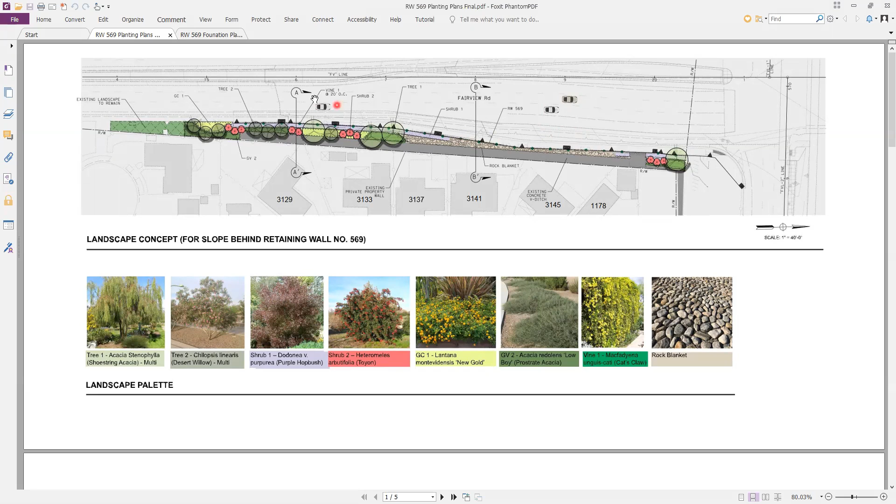So as far as what's going on out there, the improvements, as you know, the Fairview overcrossing is being rebuilt. Fairview is being widened, consistent with that bridge widening. There's a right turn pocket being added onto Fairview for access to the southbound 405 on-ramp.

And so there's a retaining wall that's being built to accommodate all those road improvements. Under that gray area there, that's actually an existing drainage ditch that conveys drainage for that area and needs to be maintained.

Under that drainage ditch, I don't know if too many people know about this, there's an AT&T duct bank utility in this area. And then visually you can see right along your property line, there's some overhead utilities located in this area as well.

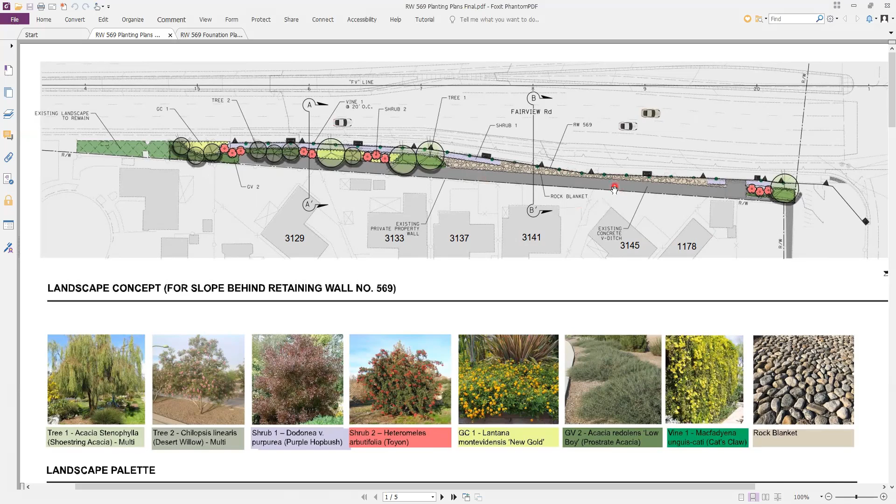So as far as what this exhibit shows, I want to go over it. This is the landscape concept plan. There's a detailed plan set already developed from this, but going from left to right, you see there's some existing landscape that remains, and then moving to the right, the proposed landscaping. In that area, there's a pretty good amount of room for us to restore the landscaping.

Going back a little bit, yes, there were existing trees in this area that were removed. So in this area here, we have a good amount of room to work with. There are some trees being proposed along with some shrubs. And then those little green dots on the exhibit, right along the wall symbol, those are actually vines.

They're on 20-foot centers, proposed to be planted on that wall. So as you move to the right, stop right there, Chris, that symbol is a rock blanket. As you go to the right it starts narrowing and narrowing, and you can see this wall alignment is following - you can probably recognize it - the right turn pocket alignment.

And I understand there's some concerns - why isn't there more landscaping in this area? Basically, we're running out of room here, and that rock blanket is on a slope. We'll get to that a little later and explain it in the cross sections. It kind of goes to a pinch point, then widens out just a bit, and to the right there's some more room, which allowed an opportunity to incorporate a little more landscaping - there's a tree and some shrubs there as well.

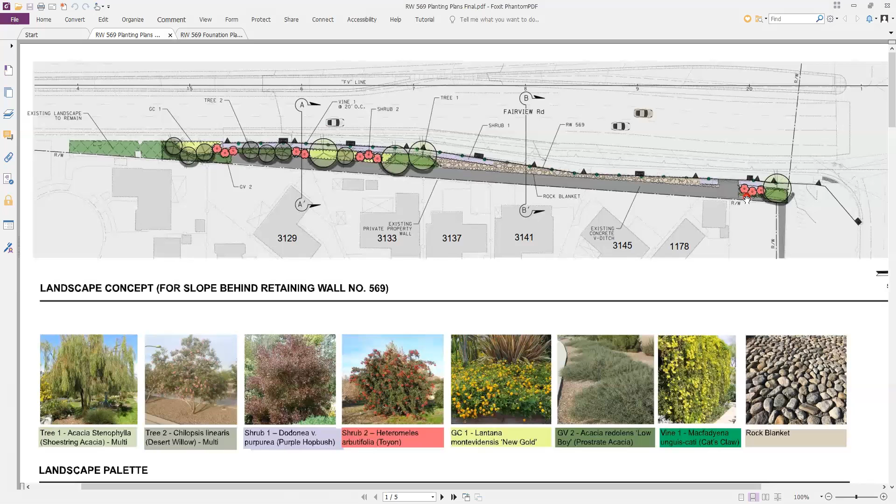So Chris, can you go to the next slide here? Let's go to the cross sections.

If you recall, this is the cross section in that area where I explained there was plenty of room to accommodate landscaping. Looking more in detail, starting with RW 569, that's retaining wall 569, and you can see that part is the retaining wall, then there's a sound wall on top of it. Then you see the proposed landscaping - there's vines, shrubs, and trees. Then there's that existing concrete drainage, and under that we'll show you another exhibit where there's a utility duct bank from AT&T, then the right-of-way, and then your property wall.

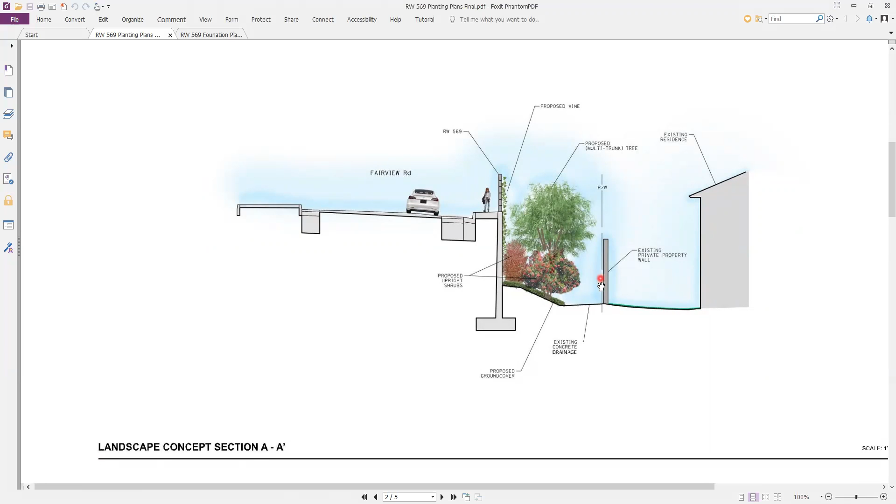Okay Chris, can you go to the next section? So BB is the narrower section of this corridor. You can see again the retaining wall and then the sound wall. In this area, there are vines being proposed at 20-foot on center. This cross section shows you what kind of grades we're working with here.

This rock blanket is being proposed to control erosion in this area and to guide the drainage into the drainage ditch. That concrete drainage ditch area is also an access road. So later on, the city of Costa Mesa will need a wide enough area - and this isn't shown on the exhibit, there's some power lines on the right of way - but they need room to drive through there to maintain that wall and the vines and what have you.

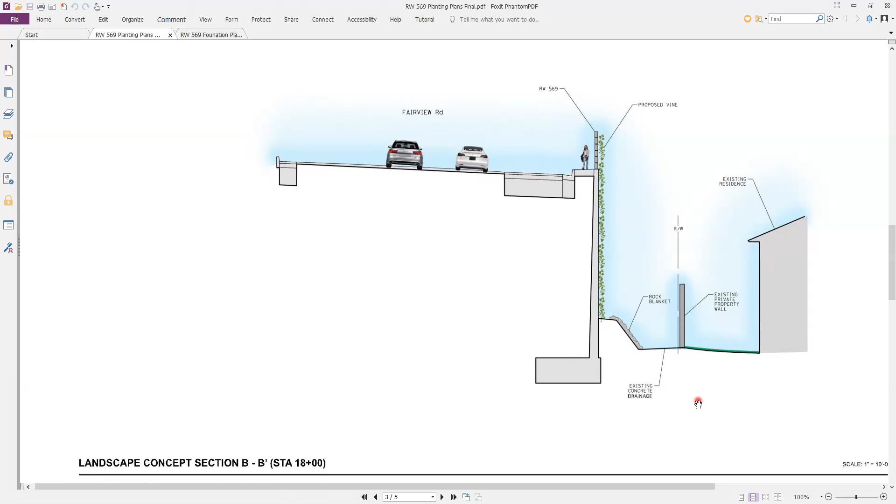Quick question, sorry to interrupt, but that access road is one of our big constraints here, along with the fact the rock blanket needs to be on a slope as opposed to another smaller retaining wall with a flat section on top that could allow more planting surface area. But how wide is that access road now, and how wide did it used to be? Because there was always an access road there, but it was pretty narrow.

It looks bigger now than what it used to be. So typically when something is rebuilt, I don't know the exact dimensions of the existing access road, but typically we try to work with cities to make things right. Whatever that width is, a 10-foot access road is very typical for many uses. We work with the county, Orange County Flood Control District, and that's typical of what they ask for, as well as Caltrans for access roads behind their sound walls and what have you.

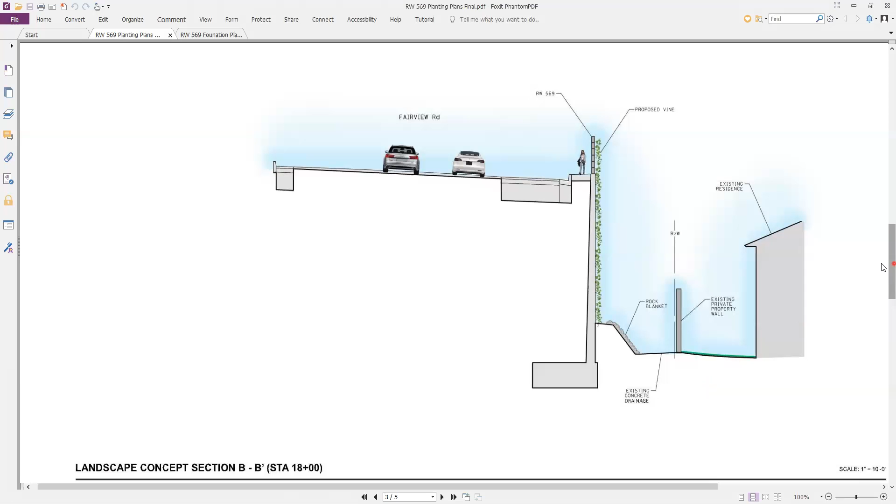And if I can chime in also, our neighbor Debbie, two houses to the left of 3145, prior to the construction there was 9 feet in this access road. Now there's 18 feet, so there's actually way more room now than there was before.

My question is, there are trees that are thinner, palmetto trees, Italian cypress. Is there absolutely no way to put any kind of tree between the rock blanket and the proposed vines?

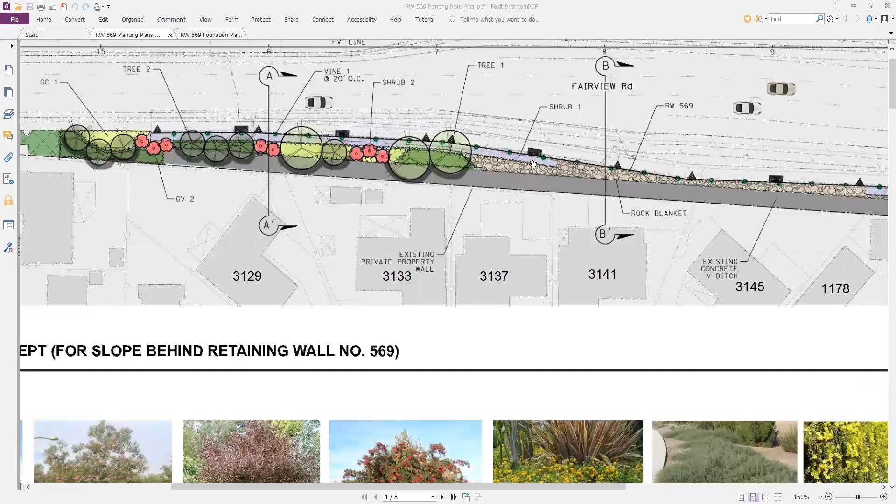We did explore this. We brought this question back to OCTA's landscape architect consultant, who checks what the design builder proposes. One thing we can potentially do in this area where there's limited space is decrease the distance between the vines. Right now, if you notice on the exhibit, it shows 20 feet on center. We can decrease that and make it more dense, essentially making the wall greener, and it will probably grow faster. I'm not a landscape architect, but that's my understanding of what our landscape architect mentioned.

We did not ask if there are other options like Italian cypress that could be planted in this area, but we can bring that question back to him.

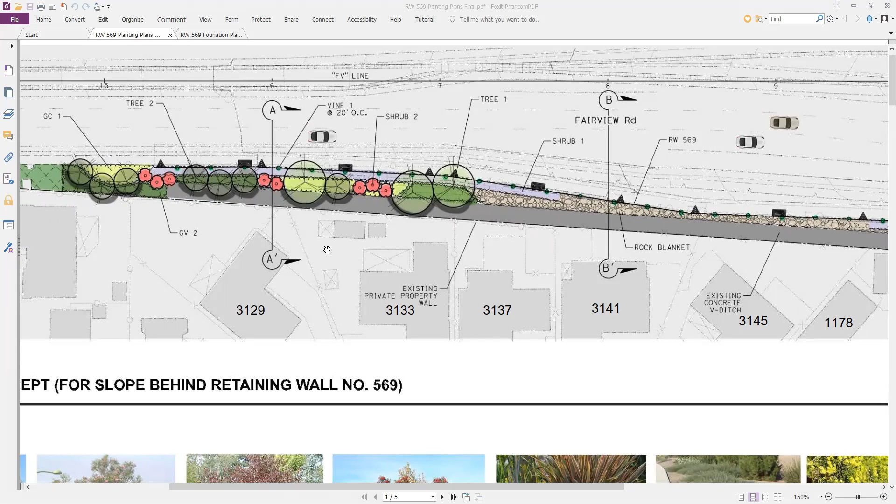Ms. Ramadan, I also want to point out that what Ms. Holtz is seeing is not the final product at all. There's still more wall to be built. As you've seen back there, they have the soil nail, sort of the inside wall. Dennis, you can explain that better than I can. And then they will have the retaining wall itself, built using forms and the rebar that you see going up currently, with concrete pours coming in as well. So the distance that she stated is not necessarily correct.

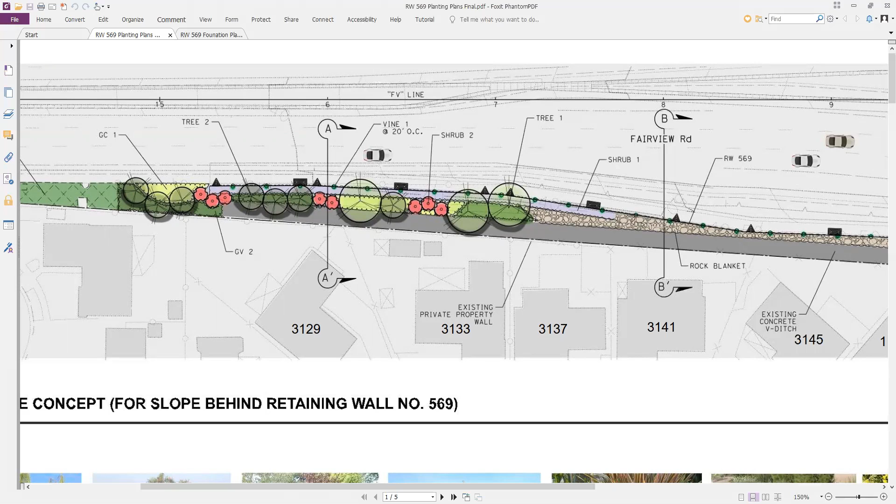To give you background, there are some soil nails being used to stabilize that slope. In progress right now, as you know, the pile driving has been completed for that wall. They're doing a lot of rebar work for the footing and the wall. You see maybe a panel or two. I have a picture from about a week ago — panels are starting to go up.

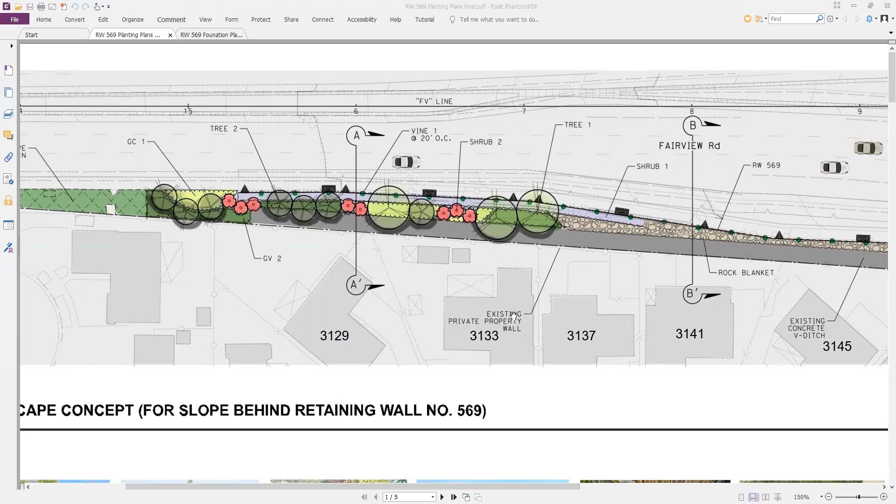They're going to start making their way south along Fairview to continue that wall alignment, and that's going to go on all the way until the end of April, where you're going to start seeing that wall being formed in the alignment. This is pretty close to the final engineering plans.

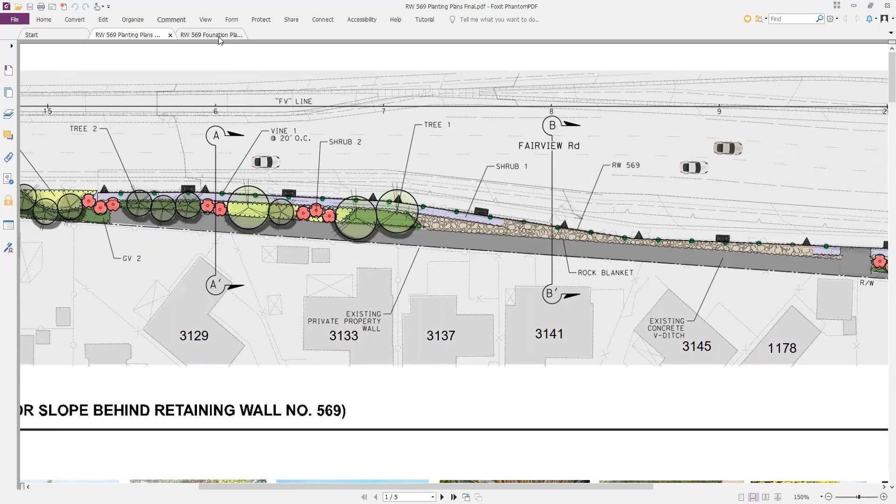We do have a copy of the foundation plan and wall plan that shows the alignment. Let's flip to that quickly, Chris. If you remember the other exhibit, that's the dark line with the squares on it — that's the wall alignment. If you remember the other one, it closely matches that landscape exhibit. That's kind of where Chris is hovering there, where there's more room, but it starts narrowing down there.

To your question, I think we can go back to our landscape architect, where Chris is touching there. There's a little bit of a triangle there, and we could look at whether there's any chance to put some Italian cypress in that area.

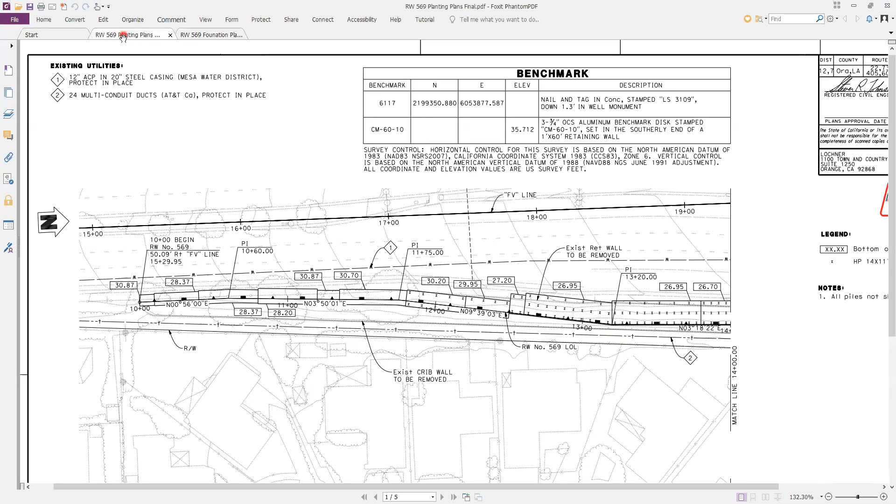Yeah, well, and this is Scott — I would challenge them also on it. It seems like at least 50% of the available space that's there, even in that narrow pinch area, is being taken up by this rock blanket concept, which I get helps with drainage and all that, but that's not the only way to do it, and it takes up 50% of the usable space there. So I see how that little flat spot on top of the rock blanket before you hit the wall is a very narrow spot. Now, whether or not you can fit a tree there is up for debate. I see trees on sidewalk strips all the time with barely 24 inches of space, yet they work.

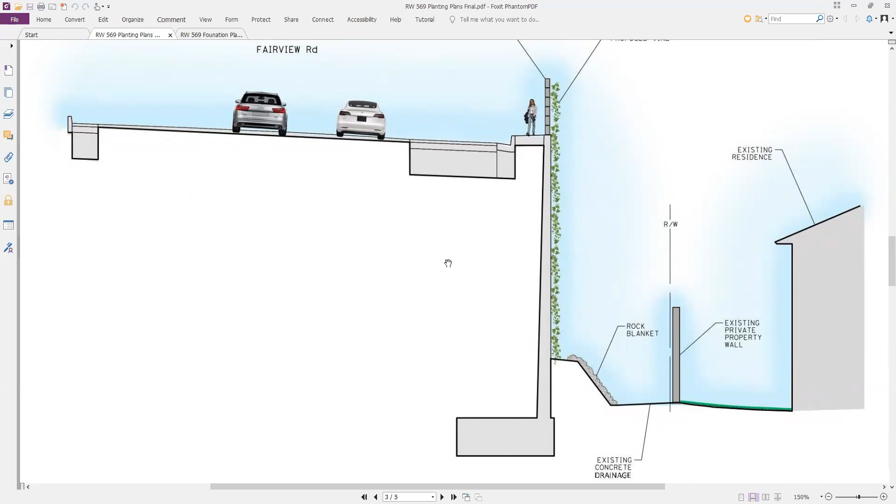If you were to replace that rock blanket with a straight vertical retainer wall and include a pipe drainage to allow water to come out of this newer, increased flat area and down into the bottom area, that would still work perfectly functional. And all of a sudden you would double your space to put a tree.

It's this concept of losing the trees. There were a lot of trees there before. They all got cut down or bulldozed. And now there are no trees, just a gray monolith that we get to stare at.

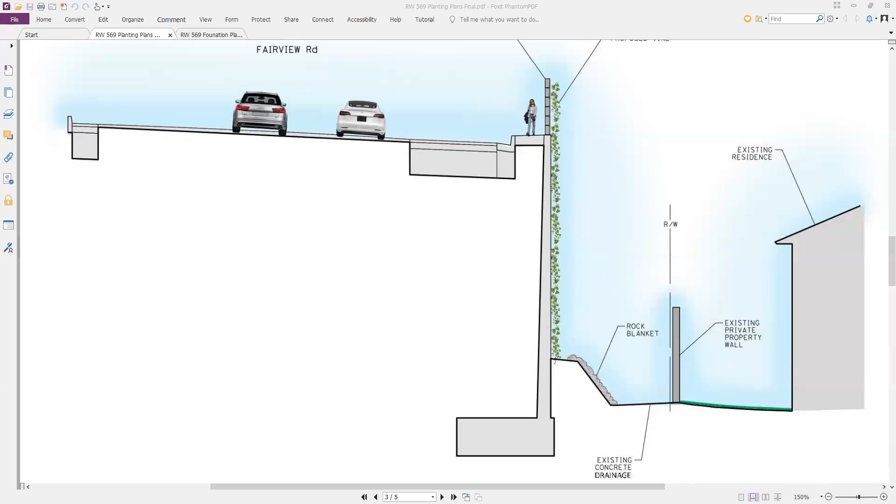And the plants that you're proposing to replace it with are relatively small, low lying. I get they're drought resistant, there's a lot of benefits to them, but aesthetically they're kind of ugly. I'm just going to come right out and say it.

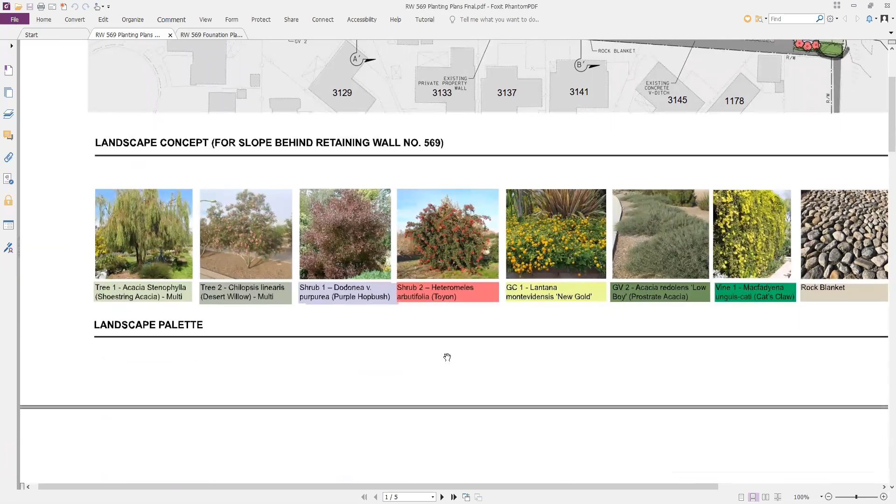I don't have to look at it all the time because my house is across the street, but I miss the trees that used to serve as a visual divider between the neighborhood and the busy road up there. And they helped serve a number of other functions besides just acting as a visual barrier.

Those are gone, and if you're Debbie or Erica or anybody else, you've got nothing back there. It's going to take a decade or more for those vines to grow. They're vines, even morning glory, they're still slow moving.

There's gotta be a better way. So if I understand your question, the idea is that in that area next to the drainage and the maintenance road area, instead of a rock blanket, to incorporate a wall, some kind of retaining wall. A small landscaping wall.

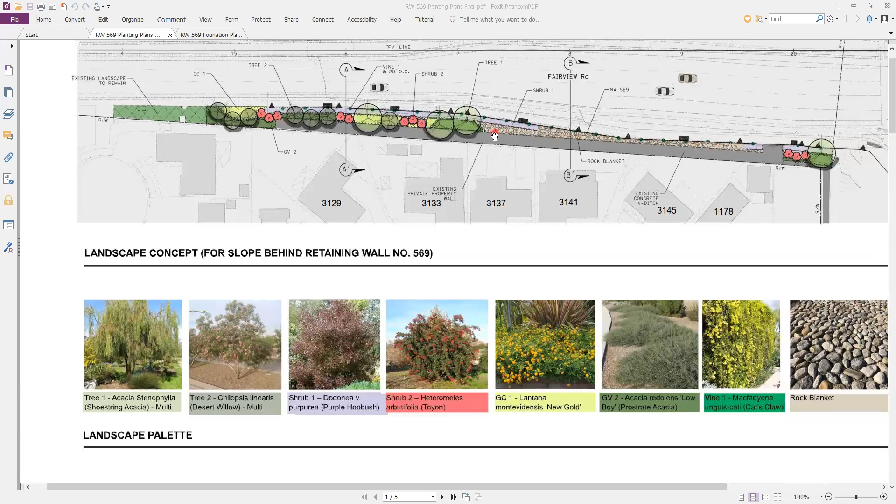If I'm eyeballing it, your cross-section view that you had earlier, I think is probably a better way to think about it. Yeah, that one right there.

Where you've got the rock blanket and where it's a slope, imagine that slope gone, and instead you have maybe a 3-foot wall, a small wall that you could make out of just about anything. And then that would allow for essentially double the flat area on top of it.

Okay, well, we can take that back and take a look at it. I'm just kind of thinking out loud here. We're going to need to look at it if it's a wall that's being proposed.

First it's City of Costa Mesa. We'll need to run this by them. They'll have to buy into it because it's going to be their wall to be maintained.

And then all the other entities in there - you have AT&T, and I believe Edison's back there too with their poles. To be honest, their poles are not exactly straight up, there's some encroachments into the 10 foot. So we're going to need to have those entities also agree on what's going on here as far as providing access.

Understood. Who are you talking to at the city, so that we may be able to grab their ear and let them know what the citizens are interested in doing? Our primary contact is Jennifer Rosales. Okay.

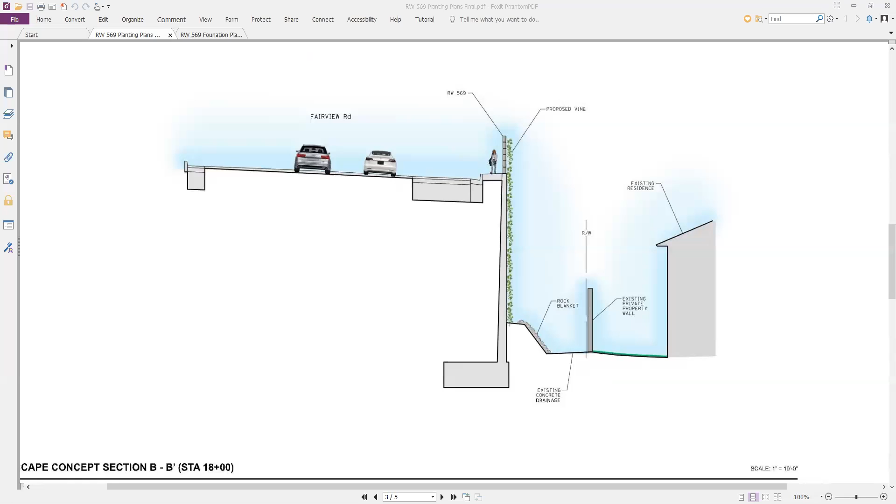Thank you. And then also, what is the dimension between the rock blanket and the proposed vine? Do you guys know how many feet that is? I don't think we have that right here. Chris, maybe, do we have the landscape plan? We're talking about right here? Yeah, actually we do, down below.

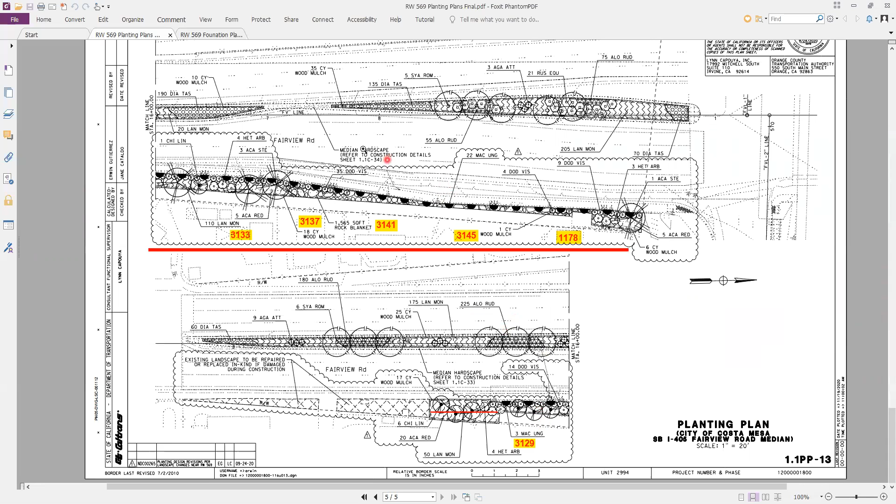I don't know if that gives you the view you're looking for, Dennis, in terms of - I don't have the full landscape plans. So if you zoom out a little bit and look at the scale.

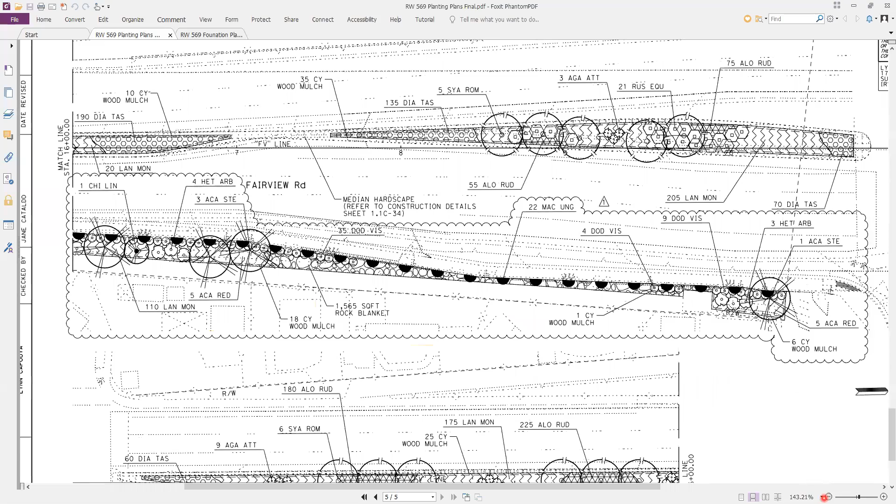Yeah, we're going to have to go back. This doesn't have the wall on there, it looks like. This is just the landscape area, but it's 1 inch equals 20 feet. The wall symbol is not on there, so I can't pick it off. We can get back to you. We'll need to go look at 2 plans and pick it off from there.

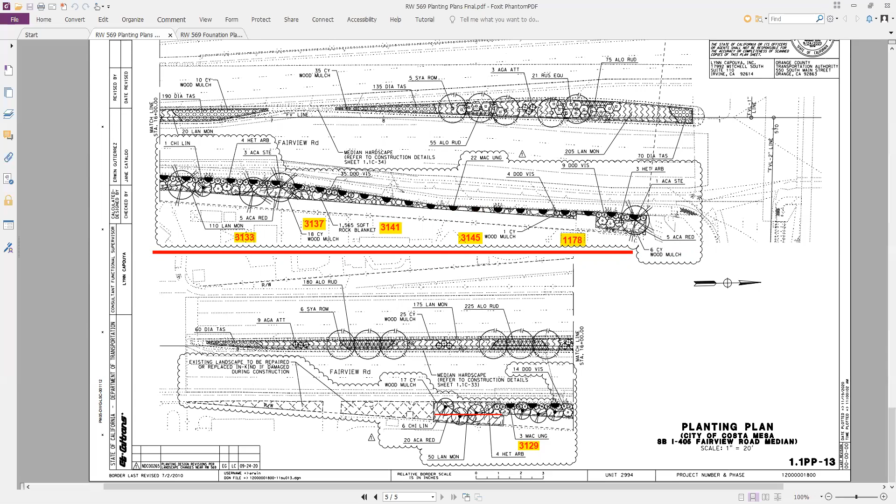Okay, and I'm just more concerned - is there no tree out there that will fit in that amount of space? That's my first question. The second question is, you guys said you've been dealing and working with the City of Costa Mesa. We were told in writing that for every tree removed, 2 were going to be put back in its place.

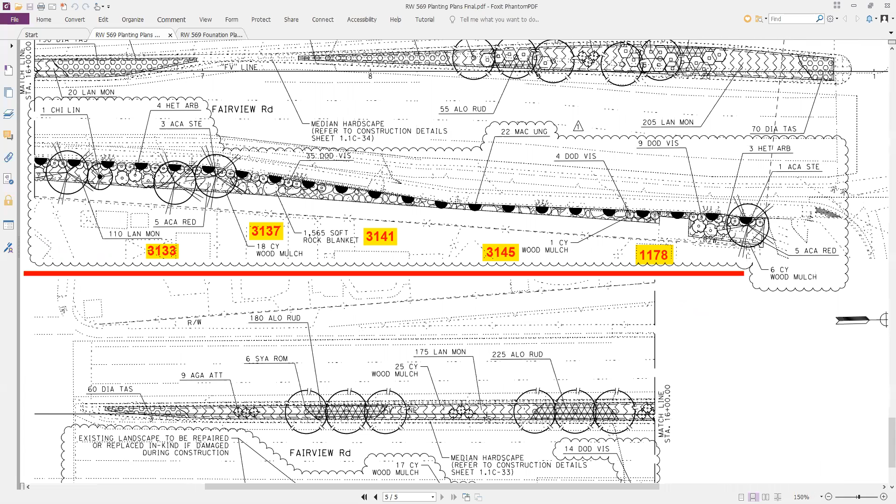Like, how is it possible to have a whole wall of trees and now nothing other than proposed vines? How did that happen? Why were we not involved? Why were there not meetings? This is significantly impacting not only our property values, there's a range of things that this is impacting, and we weren't consulted at all. And now we're going to have to live with this for decades to come.

Okay, well, we'll go back and take a look at the proposal to incorporate more trees in those narrower areas. I think the idea of going with the Italian cypress is a good idea. But I'm not a landscape architect, so we'll consult with him and get back to you guys.

Ms. Ramadan, I think to answer your question, this is the conversation to be having. And granted, you're the one pushing for that, and I appreciate the frustration you've had about the discussion. The landscaping is still quite a ways off, and that includes the rock blanket. It's significantly down the line. There's work to do on the wall itself, which is expected to wrap up hopefully by April. We talked about that before, April to May, actually mid-May.

And then there's cleanup work to do, right? They got to bring the area back, remove all the materials, remove all the equipment, et cetera. So about June, I think, is when we expect that to happen. But landscaping will take some time after that.

And the way the process works is that there is a landscape plan, a development plan for it, with guidelines, if you will, that are established early on by Caltrans. And this particular area, if you recall, was not intended to have any landscaping until you guys asked the question, and we went back and talked to the technical team and inquired further, and discovered that in fact, if they remove trees, they have to replace landscaping.